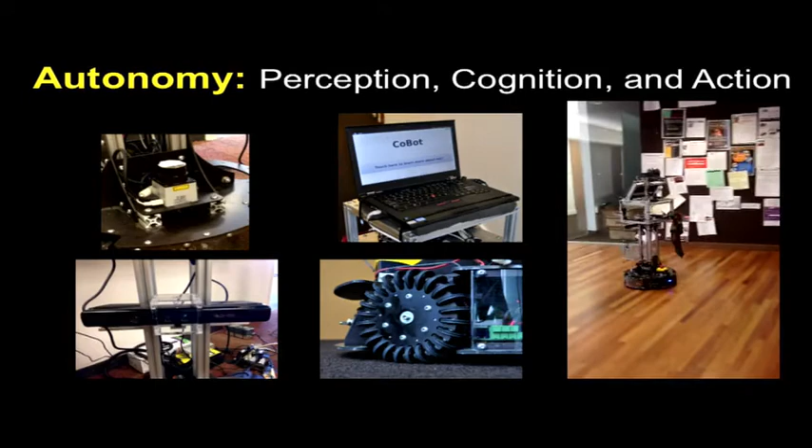So I will explain a little bit about this concept of AI from a perspective of what we call autonomy. I am going to focus on the aspects that these AI machines are supposed to be able to perceive the world, which is sensing, reasoning about objectives, and eventually actually moving.

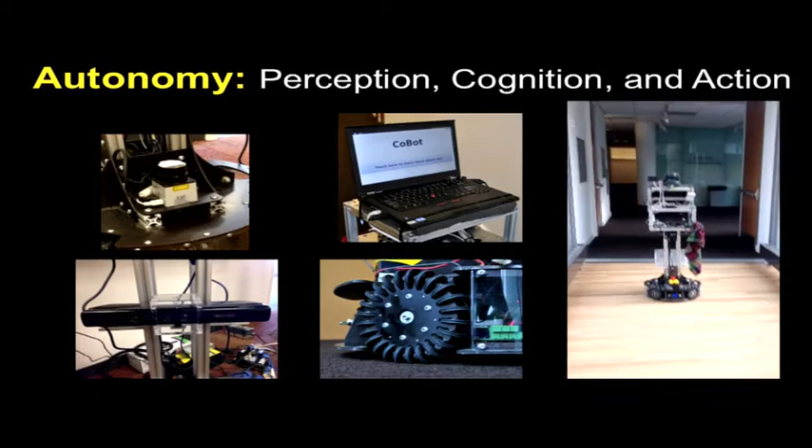So this is an example of a robot at Carnegie Mellon navigating in our corridors, this CoBot robot, autonomously, which means that nobody's remote controlling the robot, and basically the robot can decide which force to apply to its motors, which turns to take, when to stop, how to avoid obstacles. So it's completely able to navigate.

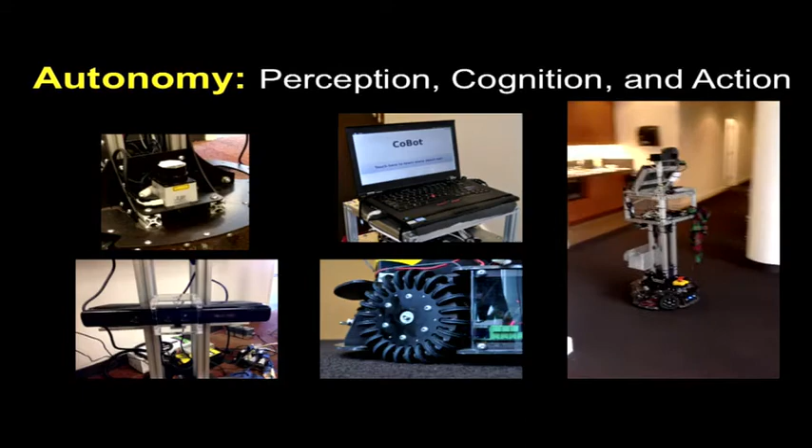So in these days in which people are so, and we are all talking about autonomous cars, you have to see that these robots in some sense are what we call autonomous indoor robots. So they don't navigate in our streets, but they are capable of navigating in our indoor environments.

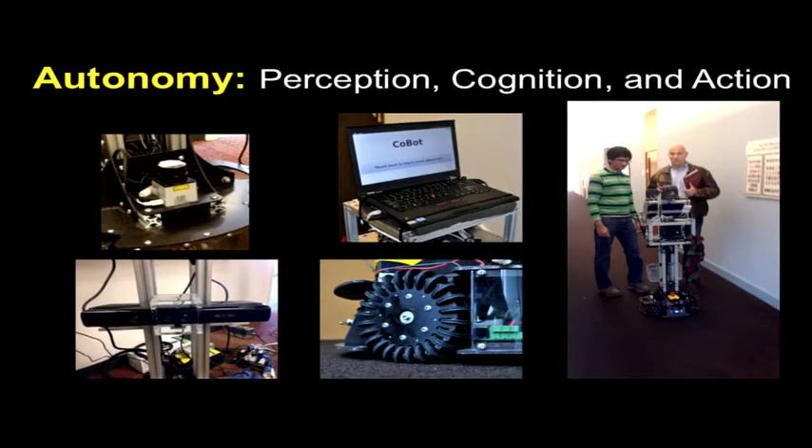So I'll spend a little bit of time just explaining from the point of view of what's in essence here in terms of actually how do they do this, and just to try to explain a little bit about this closing the loop between perception, cognition, and action.

So basically these robots and these AI devices are equipped with sensors. And sensors are just devices in robots, cameras, in other elements like text readers or OCR character readers. You have temperature sensor, it doesn't matter. Something that takes into account what's happening in the world and transforms these into some data that machines can process. So there is this concept of sensing.

Our eyes are sensors, and somehow our ears are sensors. So we are able of perceiving the world. So these robots, in particular these CoBot robots, sense the world by having this device that's a laser, which is kind of a laser range scanner.

But let's see, given that the topic is a little bit about the limitations, these lasers basically do a 2D sweep. You can have more sophisticated lasers, you pay much more, and they can have much bigger sweeps of the 3D space. But basically, it's kind of a mechanism to build information on where are the obstacles in this world. So they basically tell you at which distance the obstacles are.

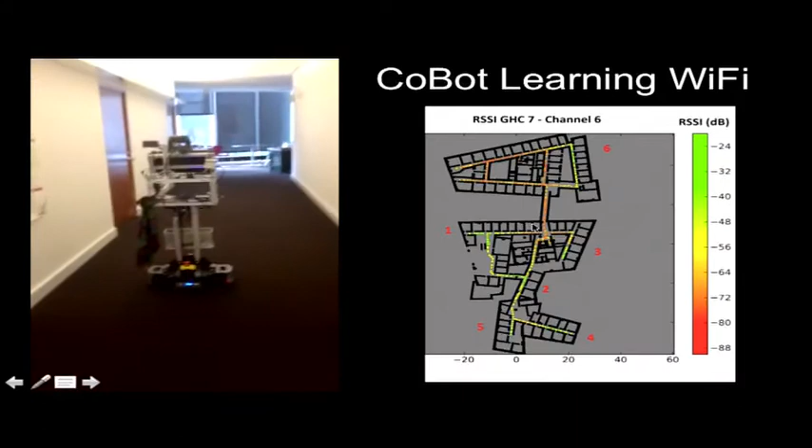So within this navigation purpose, there is something I want to emphasize that becomes crucial. A robot, because it actually knows where it is in the building, it knows its XY location in some floor plan, can be used as a mobile data collector. This is a side effect of the fact that the robot localizes well.

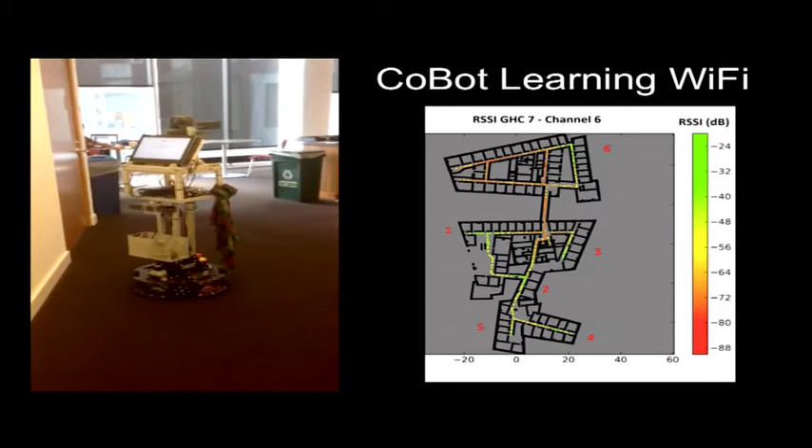This robot at CMU gathers data about, for example, Wi-Fi data at every single point of the building, because it can now assign whatever sensor it has on board to capture external variables of the building - temperature, humidity, noise level, Wi-Fi, pollution, you name it - because the side effect of knowing where it is allows it to assign the sensory data to exact locations in the building.

This is something I really would like to emphasize, because we tend to think about robots or cars moving around performing services for people, carrying people, and so forth. But as a side effect, they actually also can capture a lot of data.

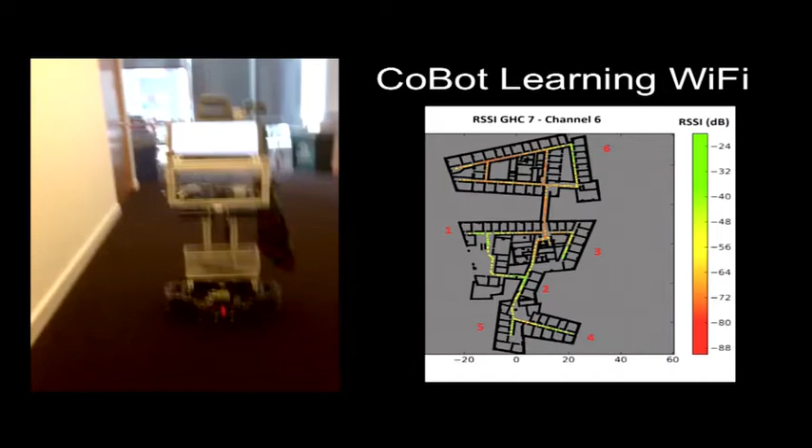So instead of relying only on the data that humans may be able to collect, we can use these autonomous robots to actively collect data as needed, because they are great machines that, in this particular case of mobility, know where they are. Therefore, they can give us data that maybe no one else can give us. So this is just a parenthesis, but this is something really interesting in terms of being able to use these robots for this type of data collection.

So these robots have navigated at CMU, just to finish this navigation part, for more than 1,000 kilometers currently, probably. This was in 2014 - 1,000, but maybe now 1,300 kilometers. And they just navigate everywhere in these buildings, in particular also at NYU. I believe this is an NYU building in which I was on sabbatical at NYU in the summer and in the whole year, and they navigated there too. So I brought the robots.

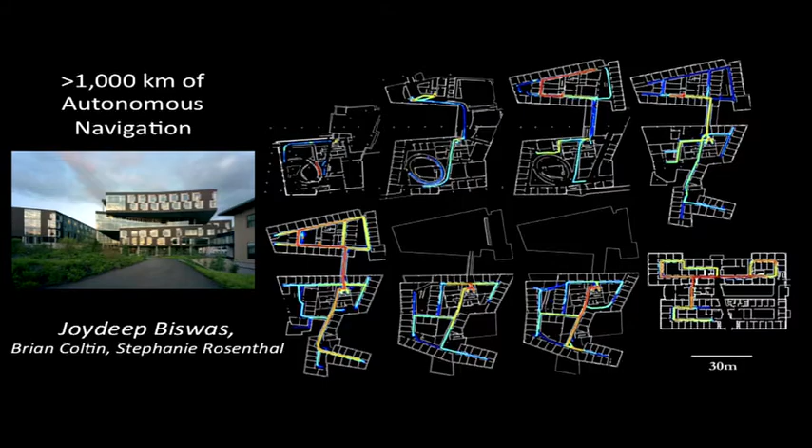So what I'm saying is that it is this concept of just having them go by themselves - nobody follows these robots. So this is the first part, but let's delve a little bit more on this autonomy aspect. The first aspect I would like us to delve on is the limitations that these creatures have. For example, they don't understand many of the things they see. Maybe with more deep learning they'll understand more, but I'll talk about this later. They might not understand what people ask, and they definitely have actuation limitations.

Our particular CoBot robot cannot go upstairs, doesn't have legs, and definitely cannot open doors. It doesn't even have hands to open all the doors of the world. So in some sense, there is this realization that these AI machines we produce, be them actual robots, or a Siri, or a recommender, are devices that have limitations. There are contributions we are making, but they have limitations.

Given this, a few years ago I was very upset because our robots, in some sense, were not able to navigate in the building. How would they go from floor to floor without my students helping eventually? So we invented this concept: the robots actually ask for help.

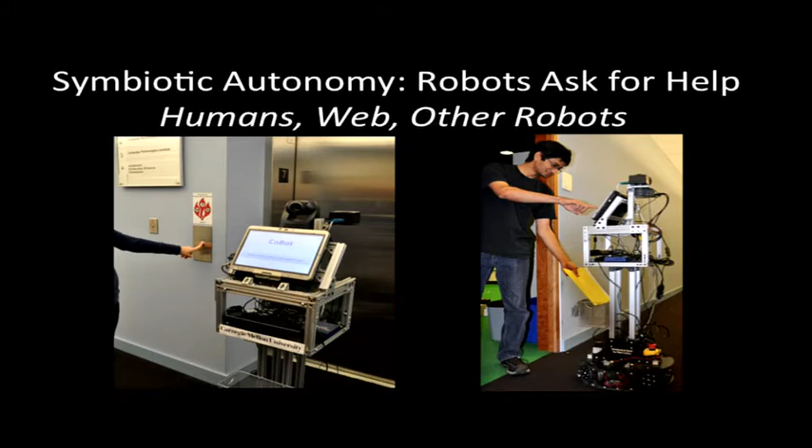These robots move in the building by themselves. We don't follow these robots. Even the other day, I constantly meet them when they're going from place to place, and nobody follows these robots. But when they need help, they ask for help. And it became a feature, the fact that when they're not capable of doing something, they just stop and basically ask any human for help.

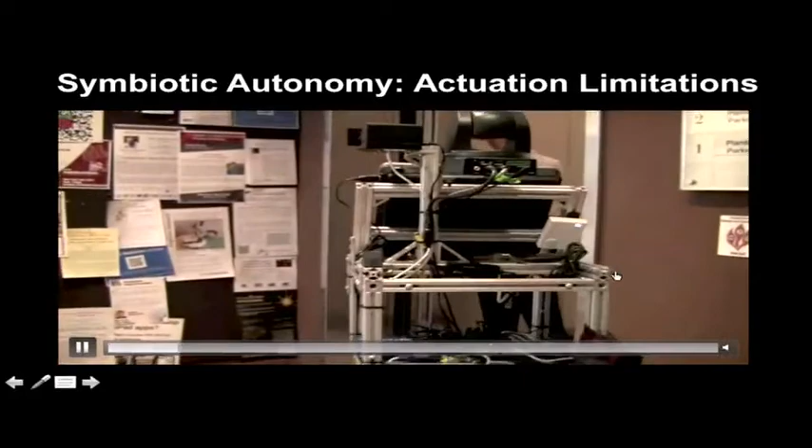So here is a robot, how they take the elevator at CMU. They just go to the elevator hall, and basically they shout: can you please push the up button and hold the elevator door? It doesn't matter, it's not targeting any specific human, and in fact it doesn't even know if there's a human around. It just speaks, and the voice synthesizer says it with one tone.

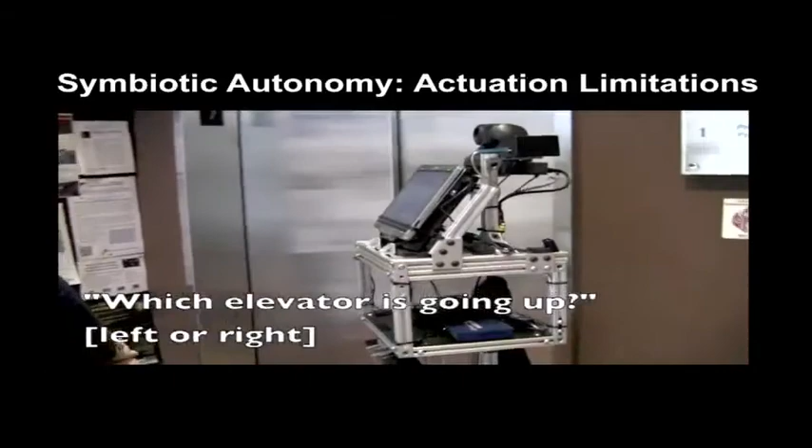Then in the second round we say it louder, and then louder, and then the poor guy stops. But I'll explain what happens then. There is always a generous human that says, yes, I'll be able to help you. And eventually, it doesn't even detect whether the elevator is on the right or on the left.

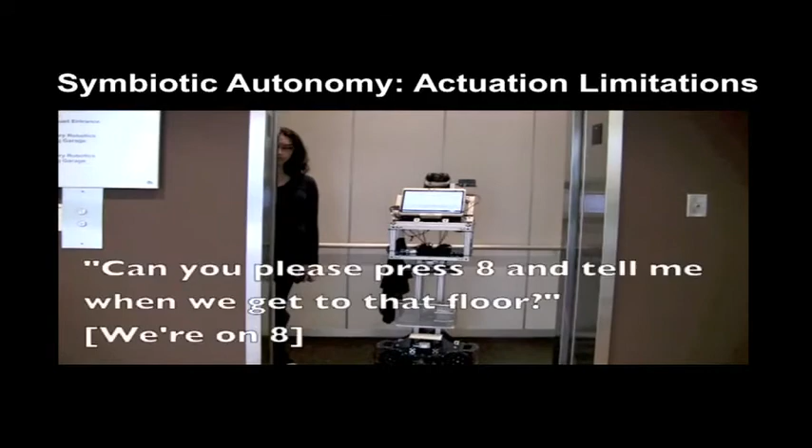Here is Stephanie Rosenthal actually helping, and the robot moves into the elevator by itself. So it doesn't ask a human to push it into the elevator. Then when it enters the elevator, it says, okay, I need to go to floor 8, press that elevator button. Someone does that. When it gets to 8, it says it's at the 8, and the robot goes out.

So the interesting thing about this is the concept that in its own plan, which involves going through this building, taking turns at specific intersections and so forth, there is that one thing, the elevator, that it cannot do by itself. So it needs help for that part of the whole plan. And that opened, in some sense, this ability to really let them go and be autonomous. So this thing is not capable.

Maybe you can tell me, oh Manuela, why don't you build a little arm that presses the elevator button? Or why don't we connect with the electronics of the elevator? I can, actually, I have now a little arm. But no matter what, there will be some other limitation that it will have. So it's not about assuming I cannot build an arm or I cannot connect with the elevator. It's more the realization that these AI systems, we need to develop them aware of their own limitations.

Now you can ask me, what if nobody presses the elevator button? What if it screams and shouts and nobody helps? Well, guess what, it sends us an email. It's very smart, and after some time, if nobody helps, if nobody is really around, or if there's someone in front of it that doesn't let it go for a while, it just says, come and rescue me. And that's it, it doesn't have any problem, and we don't need to interfere with its autonomy, because part of its autonomy is saying, okay, I'm stuck.

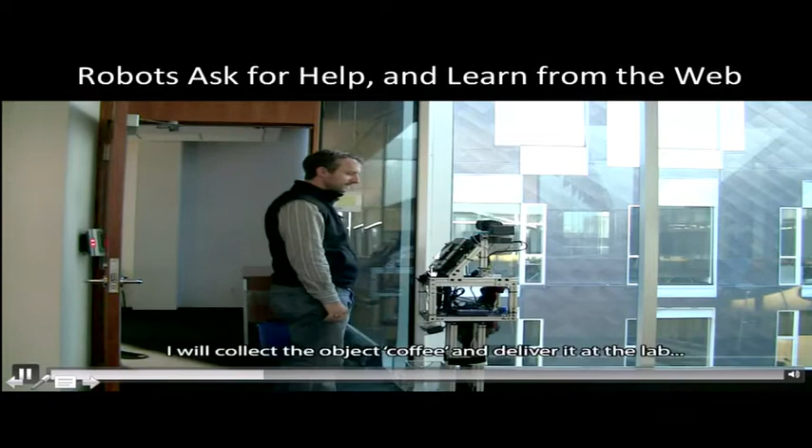Now look how beautiful. It now knows everything: I will collect the object coffee and deliver it at the lab. I recognize LAB from your speech. It had learned that LAB was some kind of room. Is that correct? Is that what you mean? Yes. Okay, I'm done.

I'm on my own, don't bother me, I can do it by myself. I was fine until then.

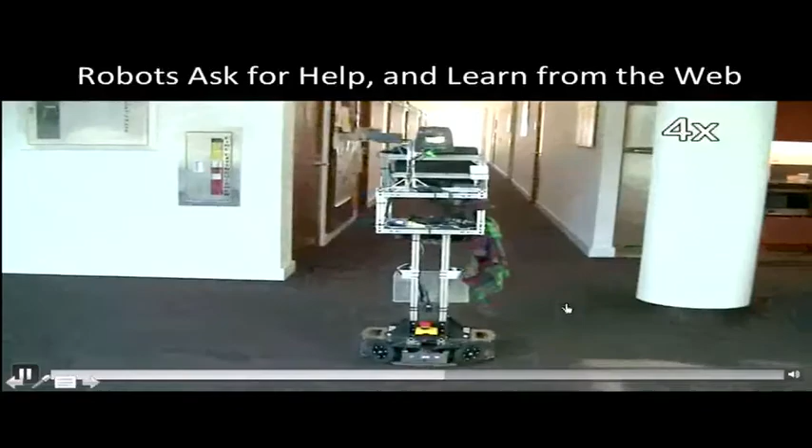Now I can ask you, how is it going to get coffee at the kitchen? How does it do it? It just stops there in the kitchen and says, hello, could you please put the object coffee in my basket? So there is nothing wrong with just asking for help. And tell me when I'm done.

Maybe somebody says, I'm done, thank you. Okay, now I can do this transportation by myself. So there it goes, and it goes everywhere and does these tasks for objects, for people, and so forth.

But this second part of asking for help—asking where coffee is—is now fundamentally different from asking to put an object in its basket, or from asking for help taking the elevator, because it actually learns. It actually learns, and I always want to show this.

So what happens internally is that the moment it knows that coffee is in this kitchen, it saves that information. Currently the robot, if you tell it to go to Manuela's office, it knows 8002 or 7002, it knows lab, it knows kitchen—not because people eventually entered all this knowledge, but because it acquired it by interaction with humans.

It can also acquire whole plans, but I don't have time to explain. We can actually instruct the robot on what to do, but let me skip this and mention this first part. I'm exactly at 20 minutes, so I'll spend the last 10 minutes on another aspect of this human-AI interaction, but let's first summarize this first part.

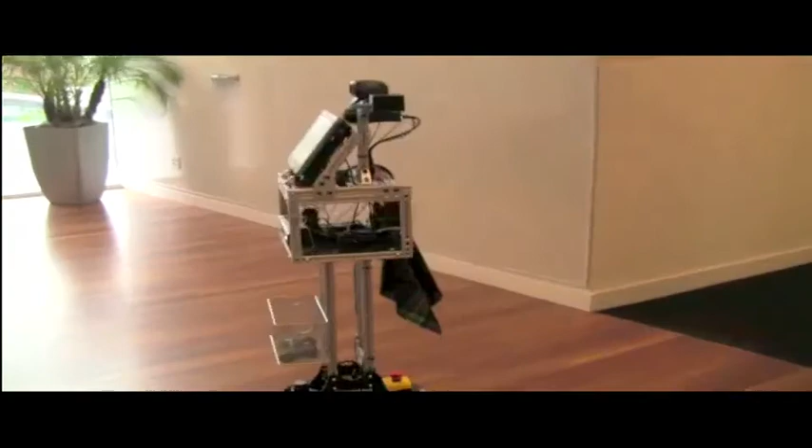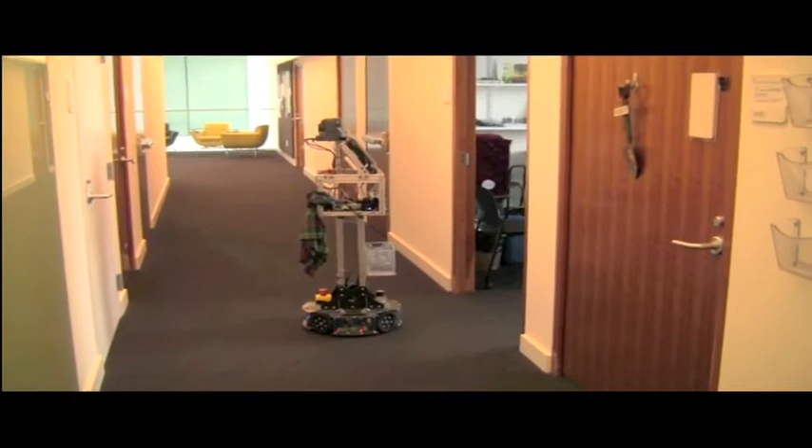An AI system, in particular a robot, does something by itself, or classifies an image by itself. So look at your experience or my experience when this robot stops in front of your office. It stops many times - I'll report on the exact number, but at least many hundreds of times - constantly stopping in my office bringing visitors and so forth. This machine is like a metal thing with a camera on top and some beautiful omnidirectional wheels built by Michael Licitra.

So you got used to the robot, you know that the robot does things, but questions arise. You would like to be able to actually ask: what are you going to do next? Which path did you take? How did you come up here? I did not follow you - you just arrived. What happened by the elevator? How long did it take to arrive here? Did you successfully escort the visitor later? Why are you late? So in some sense, all these questions about this autonomy started to arise.

This is the biggest moment in which you understand: I don't want to interact with an AI system that's completely opaque. So that started a new kind of focus. Now that robots could move, could localize, could eventually learn from the web and so forth, another aspect of this AI system became important: how do we find out what they've done while they were by themselves, while they were autonomous, whatever they did that I did not have interference on.

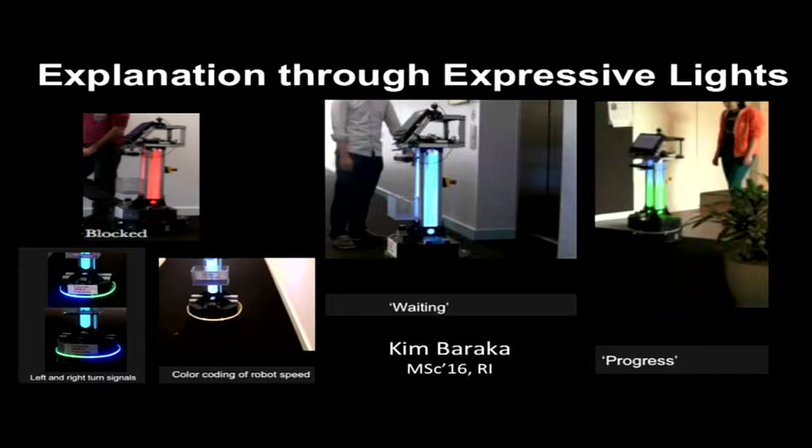This thing is also trying to find out what happens to the robot. The robots function in another world, and all the AI systems have weights, parameters, distances, angles, all sorts of information that doesn't match exactly answering the question of what happens while the robot is on its own. It's a long experience - they go down corridors, take elevators, go around, do all this kind of navigation, and see tons of things as they go.

So now it becomes a question of how do we go about translating these into things that humans understand, like locations - how do we know this is an office? We have to put semantics into it, and now we are working on this problem of having the robots generate explanations: go from that internal representation to saying 'I went straight for 15 meters and turned left, then straight for 51 meters and turned left, then straight for 10 meters to reach the destination.' At least this is more meaningful than giving us XY coordinates in some space that I don't understand. We introduced this verbalization space that enables the robots to generate explanations of different levels of detail.